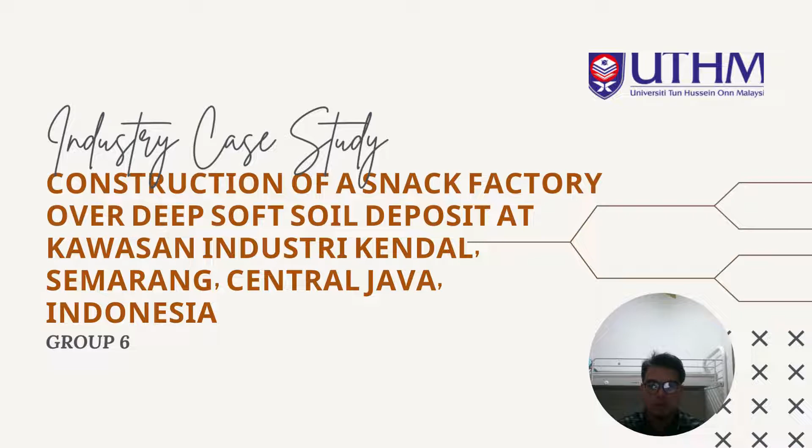We'll present to you about the industry case study, construction of a snack factory over deep soft soil deposit at Kawasan Industri Kendal, Semarang, Central Java, Indonesia.

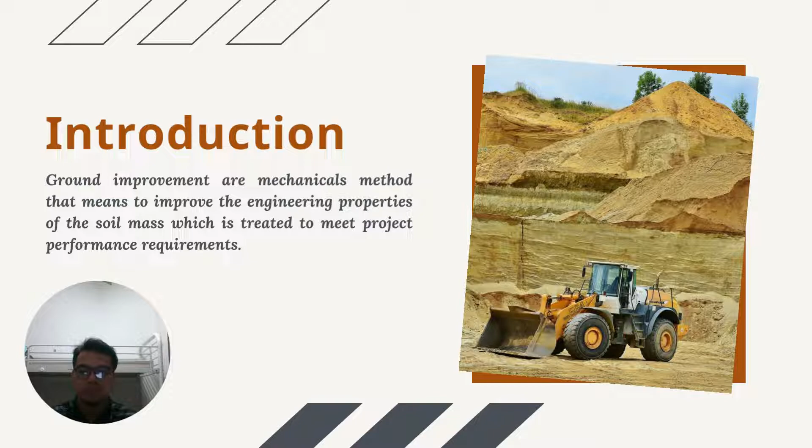This project has been conducted in Semarang, Indonesia, where the owner has proposed to build a factory, office and warehouse.

The problem with this project is that the location is covered with soft soil more than 20 meters deep, so it is not suitable for pile foundation to be used in the area. The soft soil characteristics may influence the project during or after the construction phase because a good bearing layer for pile foundation has not been found in that area.

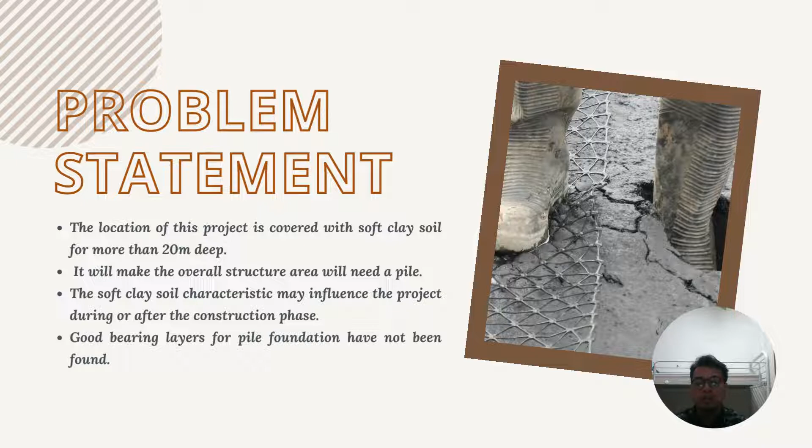Our objective is to identify and analyze the suitable method of ground improvement in that area, and we need to propose the detailed field implementation of that method.

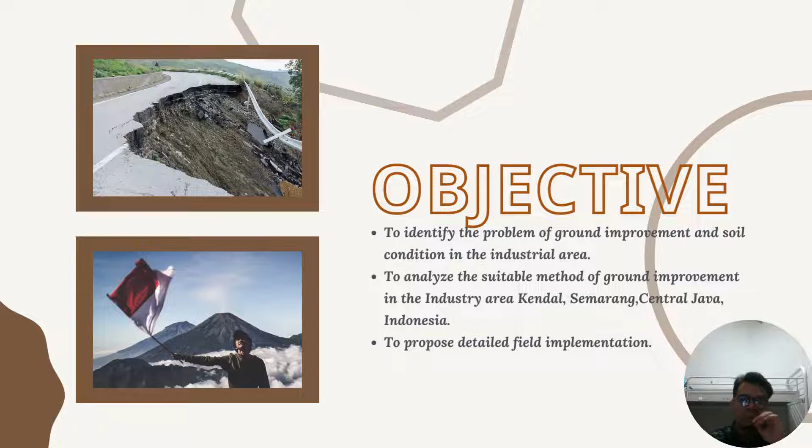This is the soil profile that we get from the soil data, and it shows that the area is covered with soft clay soil for more than 20 meters deep.

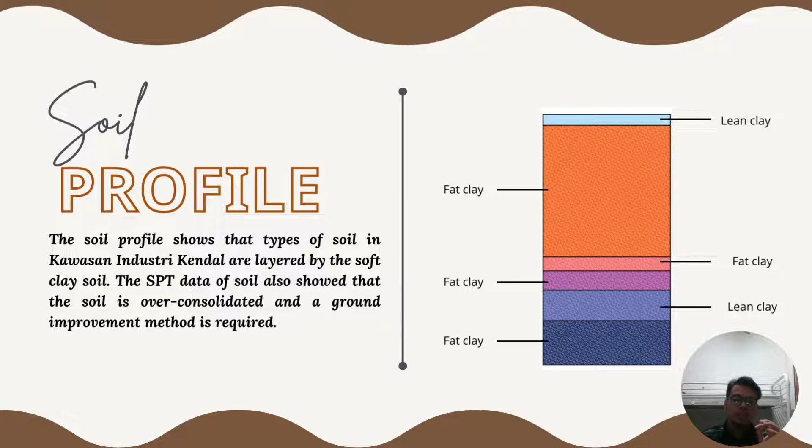I'm going to present about the vacuum preloading method. Vacuum preloading is a method that uses atmospheric pressure as a surcharge to improve soil characteristics.

It involves a drainage system, sealing or isolation system, and vacuum pumps. This method is conducted by applying vacuum suction into an isolated soil mass to reduce the atmospheric pressure and pore water pressure in the soil, resulting in soil consolidation and effective stress enhancement without changing the total stress.

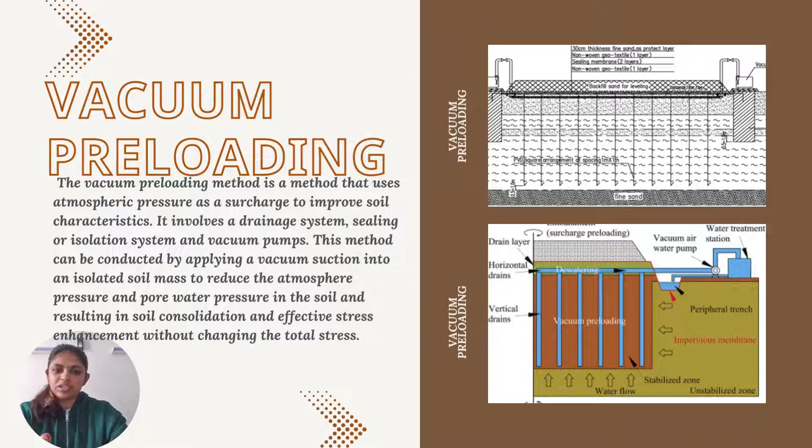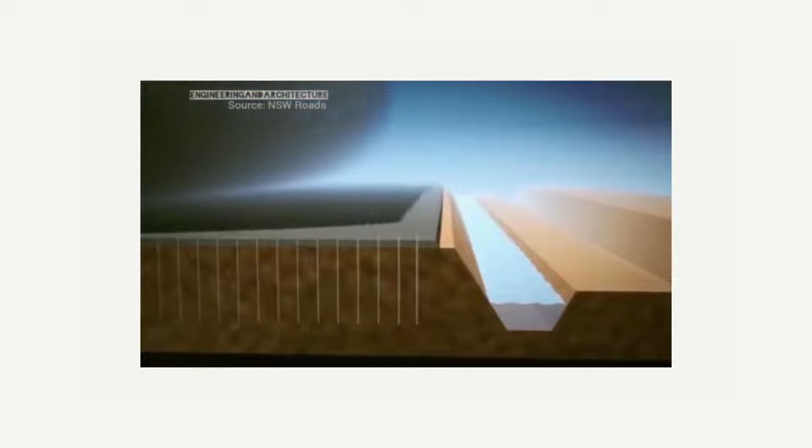For step 1, prepare a working platform for equipment to safely access the job site. This is followed by installation of prefabricated vertical drains and horizontal drains network within the target improvement area.

For step 2, place a 30 to 50 cm thick sand layer on top of the PVD and horizontal drains network. Place geotextile on top of the sand layer. Finally, cover the whole target improvement area with geomembrane as presented.

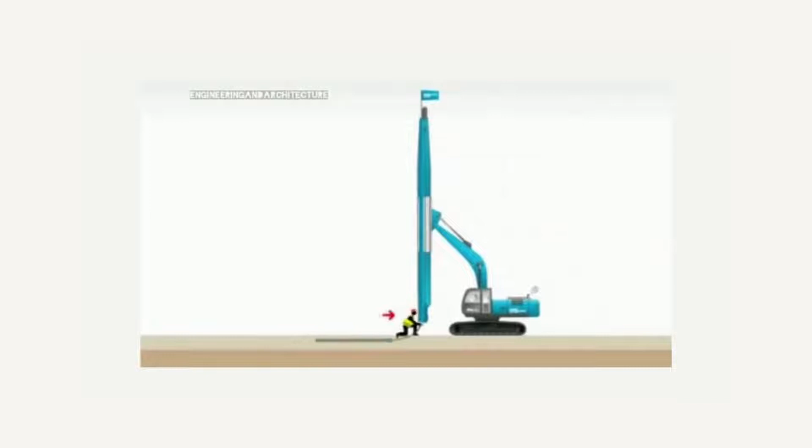The sand layer and geotextile function as a protective layer to protect the geomembrane against puncture by any leftover sharp roots or stones. Step 3: connect the HDPE pipes placed underneath the sealing system to the vacuum pump using flexible pipes.

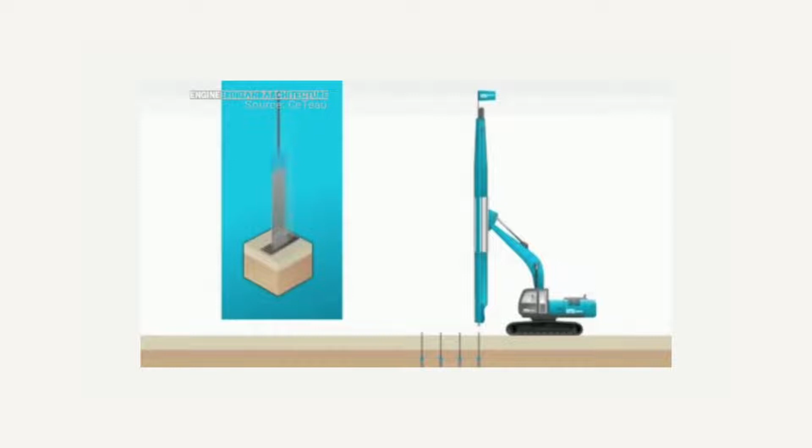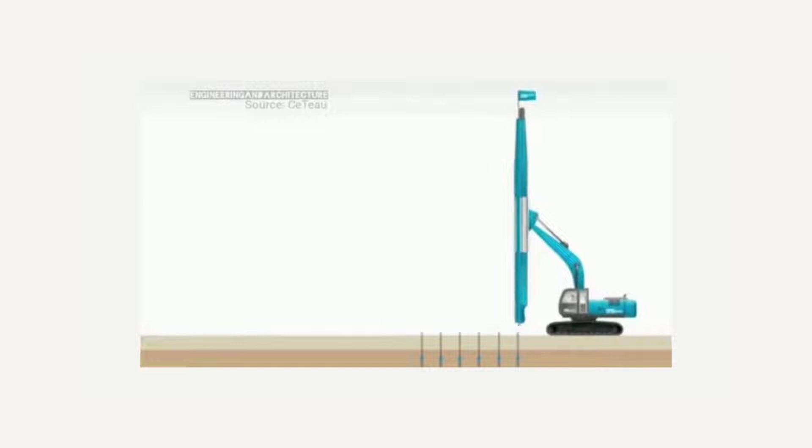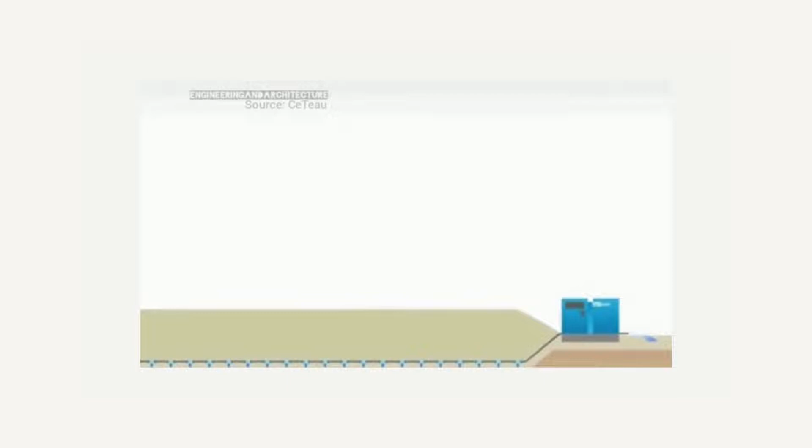For step 4, the vacuum pump is started to pump out water from within the improved zone, and vacuum pressure is monitored and maintained around 80 kPa whenever necessary. To further accelerate the consolidation process, water that comes out is sometimes pumped back and poured on top of the improved area to act as a surcharge.

We produce both the prefabricated vertical drain material and the prefabricated horizontal drainage material, commonly known as the PVD method, which is used to enhance soft ground.

The standard PVD technique requires a significant amount of natural sand for the sand blanket or soil for preloading. Our prefabricated vertical drain method can enhance soft ground even in those situations.

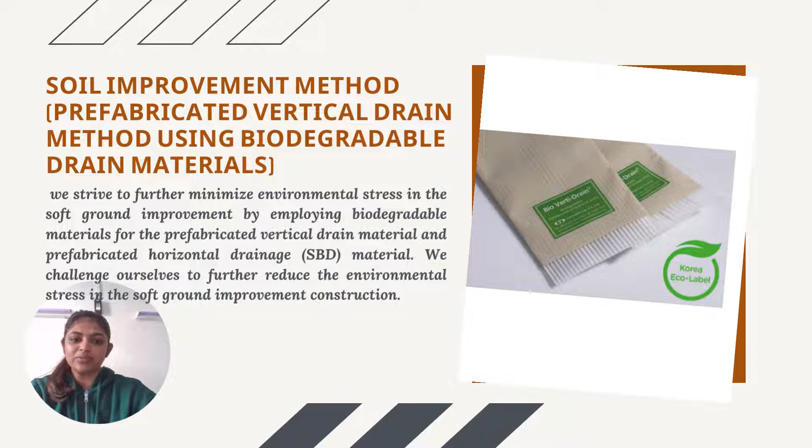As a result, not only is the cost of sand and soil minimized, but environmental stress is also reduced. We strive to further minimize environmental stress in soft ground improvement by employing biodegradable material for the prefabricated vertical drain and prefabricated horizontal drainage material.

Our group's idea and innovation to achieve our objectives for ground improvement is using biodegradable plastic instead of PVD in the vacuum preloading method. Biodegradable plastic is eco-friendly for soft ground improvement, which well reproduces the physical advantages of prefabricated vertical drain. It is also biologically degraded after installation and ground consolidation in natural soil condition without leaving any residual plastic behind. Bio-prefabricated vertical drain is the first prefabricated vertical drain that obtained an Eco label from the Ministry of Environment of Korea.

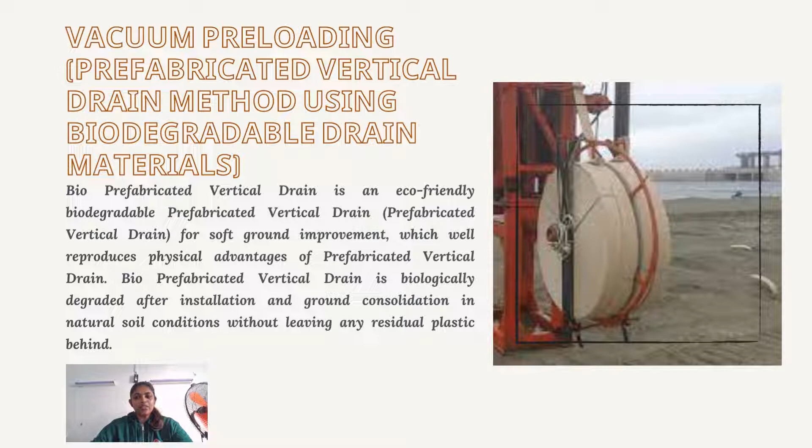Next, I will explain the advantages of biodegradable plastic. There are five points. First, the cost of producing biodegradable polymer is higher, but in the end it is worth it. Second, depending on the substance used, manufacturing the bioplastic and disposal technique, biodegradable plastic only degrades over a few months.

Third, products made of biodegradable plastic are more in tune with nature. Not only that, the plastic may be easily recycled using organic methods and requires less time to degrade when thrown away than other varieties. Last, the soil can become fertile by composting bioplastic products, improving soil fertility.

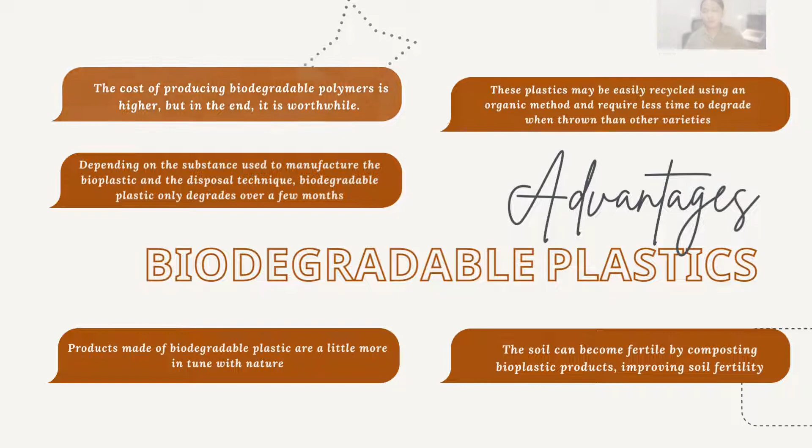For the disadvantages of biodegradable plastic, there are 5 points. Biodegradable plastics are produced from plants like corn and soybean. As a result, there is a possibility of contamination since the crop is frequently treated with pesticides while within the ground, and because they are easily transferred to incorporate in a finished product.

Next, the requirement of expensive industry processes and composters is a drawback of biodegradable plastic, especially materials that must be broken down at higher industry temperatures. In addition to the price, there is a requirement for equipment capability which might be an issue. Bioplastic should not be combined with plastic that wouldn't biodegrade, because it is impossible to determine if the crop used to make this polymer was exposed to dangerous substances.

Next, since cornstarch is one of the main ingredients in items made from biodegradable plastic, the biodegradable plastic must be decomposed properly and quickly. This implies that rain may speed up the deterioration. Last, biodegradable polymer may disintegrate incredibly quickly, even with less effort.

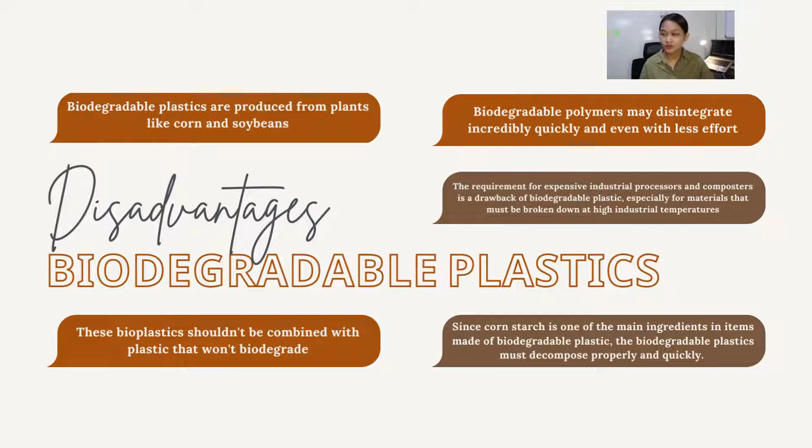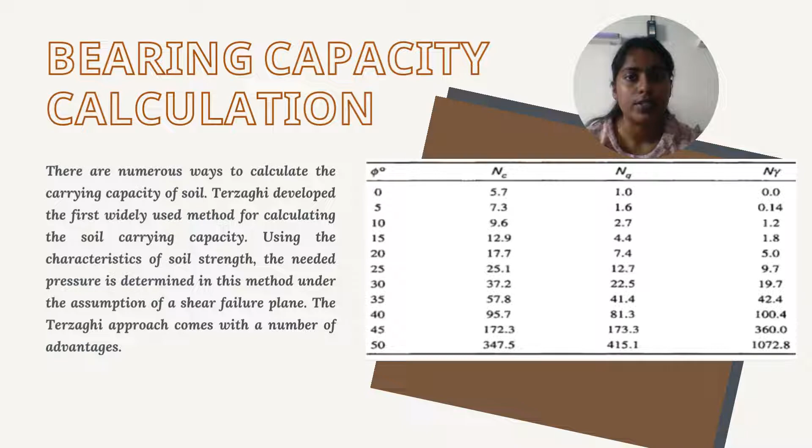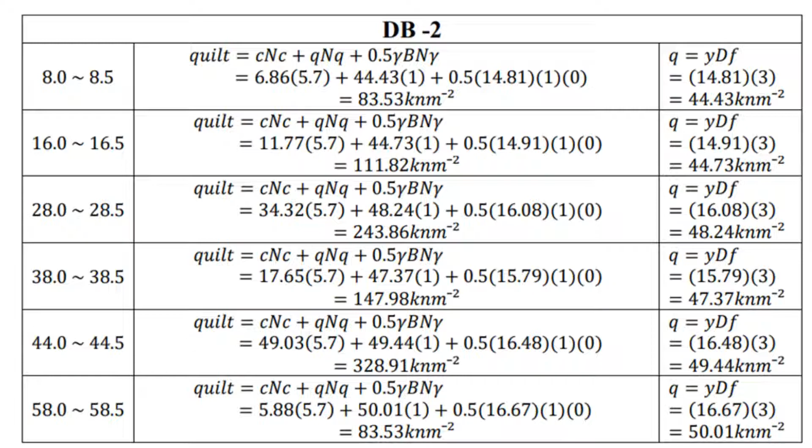Next, I would like to explain the settlement analysis. In our project, the total value of the effective overburden and the assumed value is already higher than the pre-consolidation pressure. Thus, we assume that the soft clay in our project is over-consolidated. Thus, the ground improvement method is required to make improvements to the ground. So in our project, we used case 1, and the settlement value we got was 323.208 millimeters.

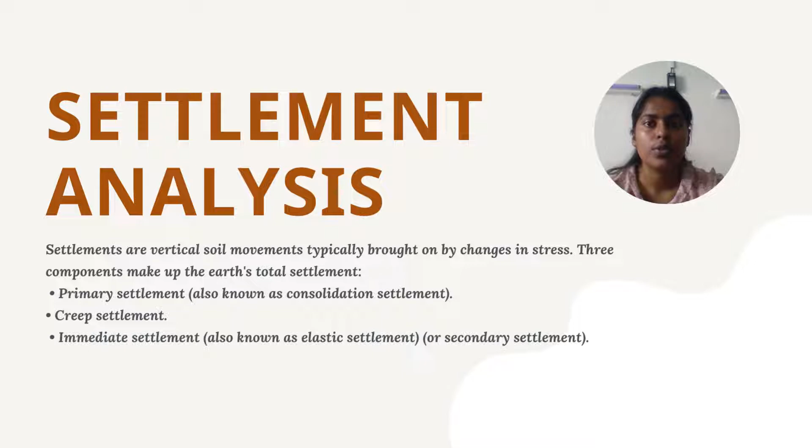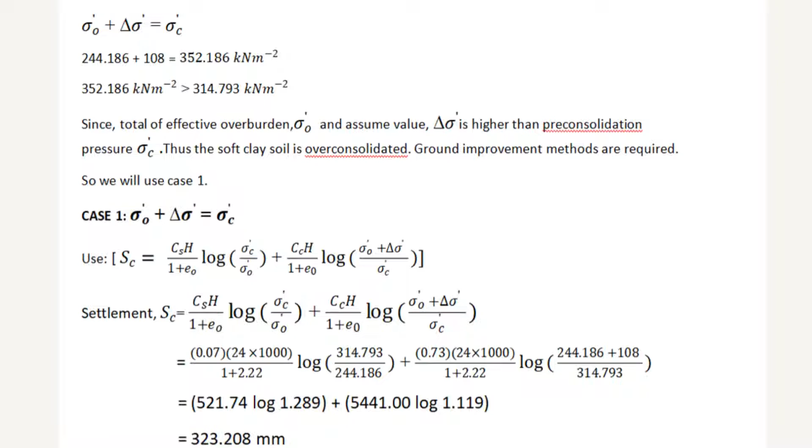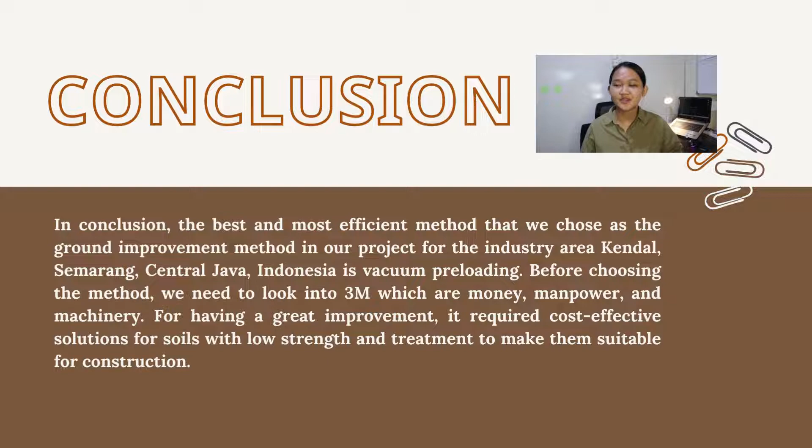In conclusion, the best and most effective method we chose as the ground improvement method for our project in the industrial area of Kendal, Semarang, Central Java, Indonesia, is vacuum preloading. Before choosing the method, we needed to look into 3M, which are money, manpower, and machinery. For a great improvement, it requires a cost-effective solution for soil with low strength, and treatment to make it suitable for construction.